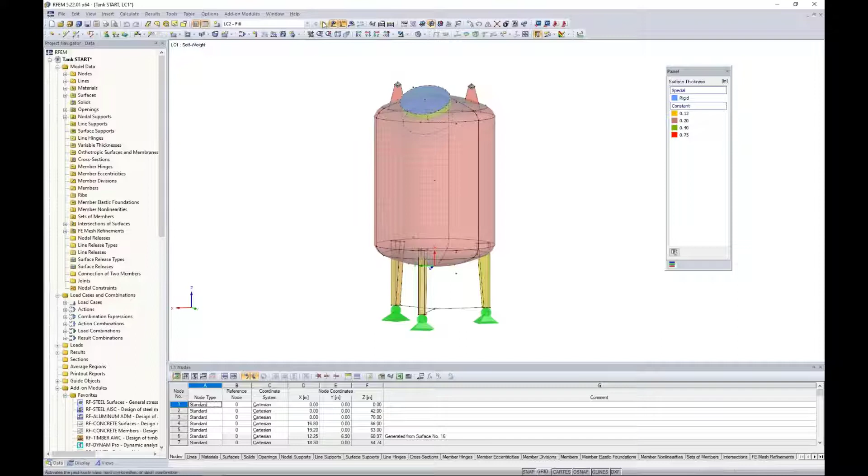We also had applied the loads to the structure, and we can see that within our drop-down box here are our different load cases. We have self-weight, which I don't have any visible loads displayed here because I didn't apply anything to the dead load other than accounting for the self-weight. The load case 2 here is the fill load, and this fill load was just an interior surface load within the inside of the tank.

We also have a wind load, so we can see the windward direction here from the global x-axis. We have a suction force on the leeward side. We also have a compression force coming up from underneath the tank, and we have a tension force up at the top here. Now we also put together all of our load combinations per the ASCE 7.

So as we scroll through these, we can see all 3 of those different load cases acting together on the structure. So starting where we ended from webinar 1, we'd want to run a calculation, and we can go to calculate all. And for the sake of time, I've already went ahead and done so.

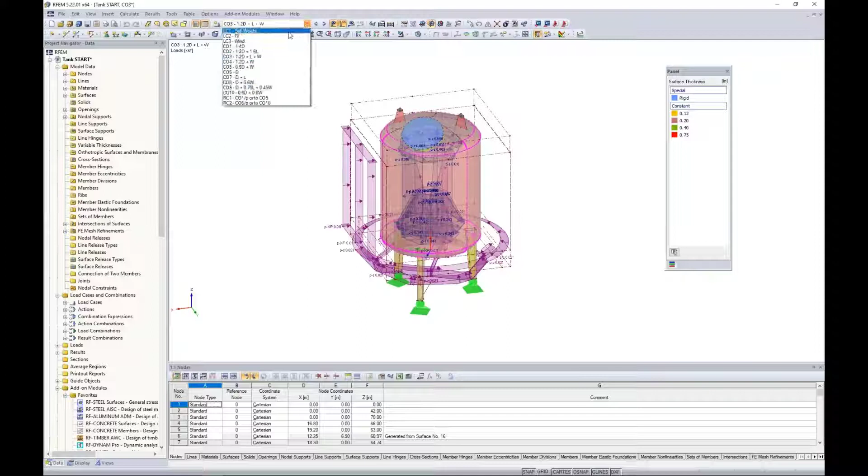So what we would be presented once we run the calculation is our results. And within the project navigator, we should now have this 4th tab available to us called results. And I think it's helpful if we just collapse most of these trees here, just to slowly go through all of the visible options, and we'll start off with the global deformations.

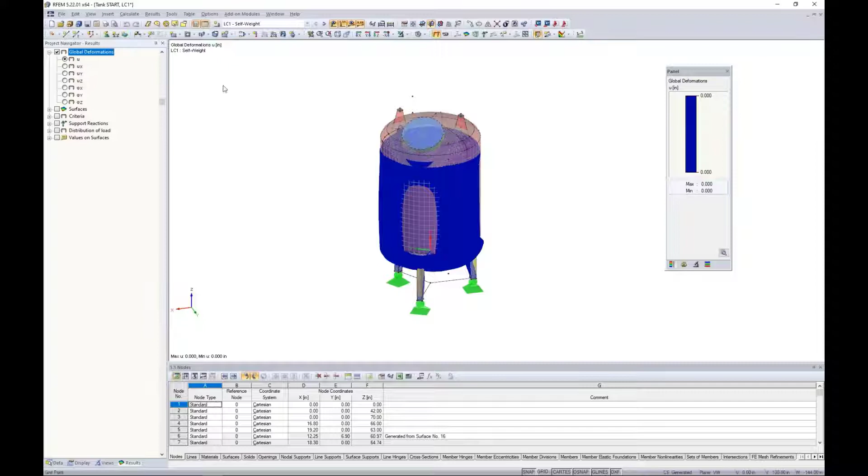So as I'm scrolling through these different load cases and load combinations, and I can go ahead and turn off my loads as well, I'll see the general deflection of the structure. So this might be helpful in understanding the behavior under the applied loads. If we see something kind of flying off the page here, then we would understand that maybe we didn't correctly model something, or maybe our loads were incorrectly applied. So it just gives us a sense here if everything is going well.

What else might be important is my fill load. Remember from webinar 1, when I double click on this fill load, we have it increasing linear in the Z direction. At the top of the tank, I want this fill load to be 0, but as we slowly increase the depth, we eventually reach a magnitude of 0.4 kips per square foot, which makes sense since the bottom of the tank sees a higher fill load than the top.

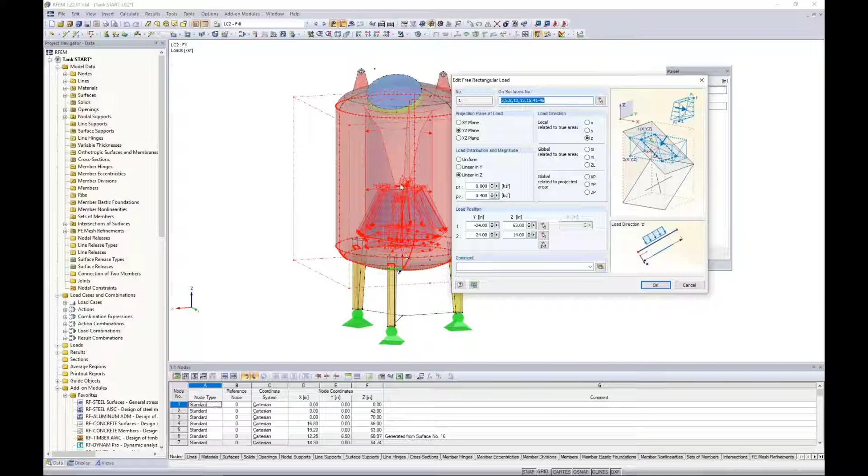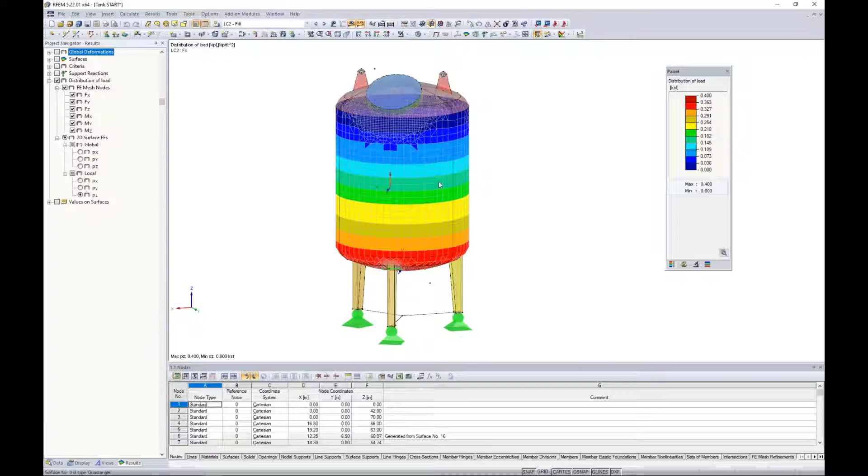So with this particular load case, after I have run my results, I can turn off the global deformations and instead take a look at the distribution of load. When I view the distribution of load in the local Z direction, we can see how this load was distributed on the FE elements.

At the top, we have this blue color indicating 0 kips per square foot, which is exactly what I defined with that surface load. But at the bottom of the structure, we have red contours defined, which equals 0.4 kips per square foot. So just a nice validation here that we correctly applied that fill load.

In a similar sense, we can take a look at the wind load. If I display this load again, we have this wind load acting in the global X direction. Looking at the distribution of the load with these contours, I should see my highest compression force on this windward side, which relates to the negative value. And in the back, we have this suction or tension force, denoted by this yellow positive value at about 0.01 kips per square foot.

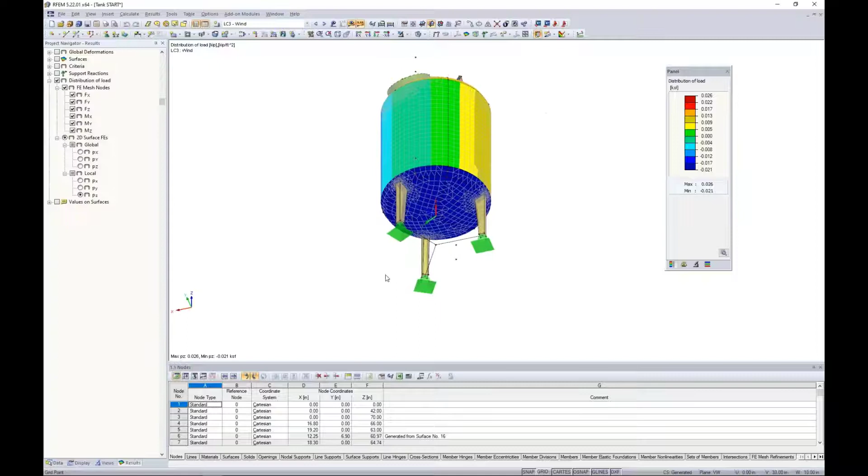At the sides, I should see essentially 0 because the wind's passing right over each of the side surfaces, denoted by the green color. If we take a look at the bottom, this shows the correct compression forces. And at the top, we have these suction forces denoted by red with a positive 0.026. So again, just a nice validation to ensure that we've applied our loads in the correct manner.

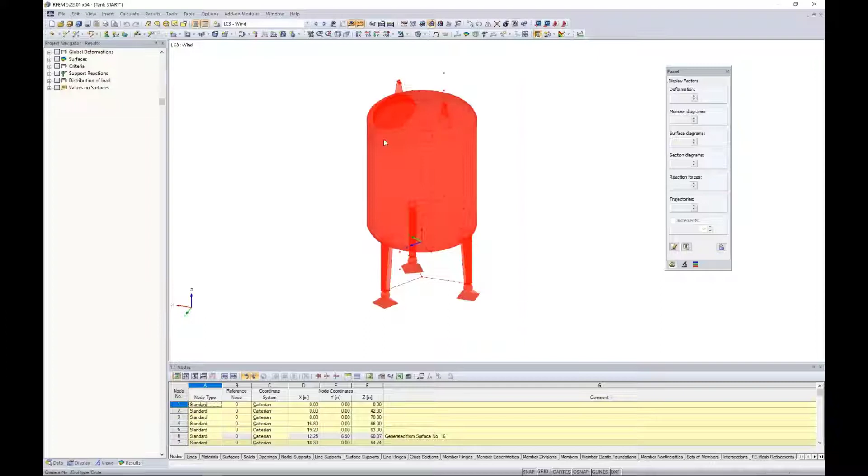We also can take a look at the entire structure by selecting it with my selection box. I can right click and view the center of gravity and info. The program throws up a warning that some elements have 0 density and won't be included with the center of gravity. We know this because in webinar 1 we created different intersections with our surfaces and deactivated components. We also have our rigid component for the top of our manhole that we would not want to consider for the density, so that's why those are set at 0.

But what this will give us is the information of the center of gravity, and we can also create a new node here. It's difficult to see, but there is a red arrow pointing to the center of gravity. More importantly, we can get information such as the surface area and the coating of the surfaces.

So why would the coating be important? Well, if we wanted to layer some type of coating on this tank structure or paint, we actually have the area in feet squared of how much paint might be required. We have the volume of the material as well as the weight of the material. So just a general summary of all of our surfaces that we have modeled.

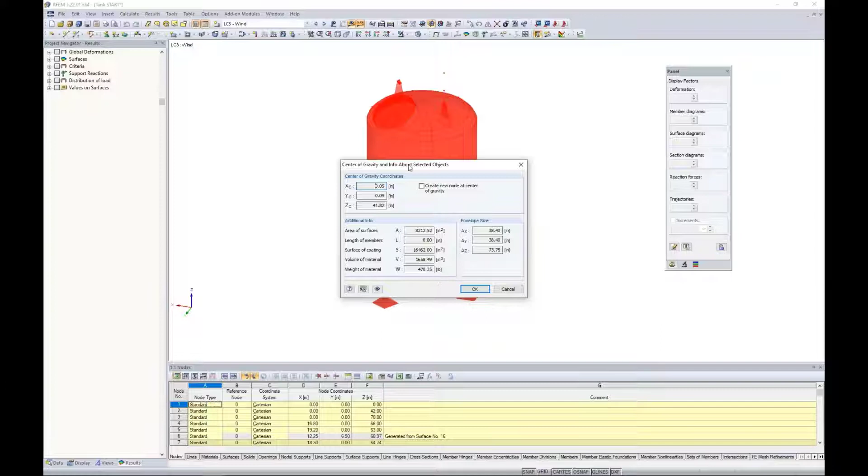In a similar sense, I can take a look at my tables, and I'll jump to my results here, which is table 4. I can view my results summary. What might be interesting is to jump down to load case 2, our fill load again. We can view the sum of the loads in the Z direction, and you can see it's set at negative 3.03 kips - this is the total load from that interior fill load I've applied.

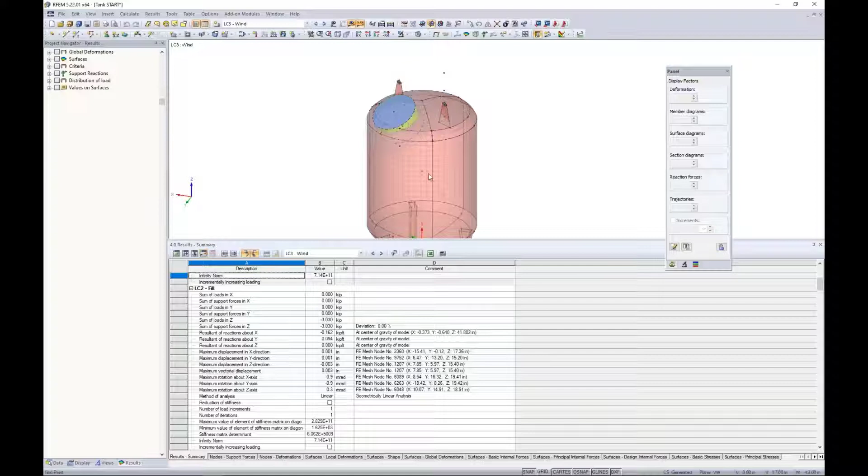Well, we would expect then for our support reactions to match this sum of loads. So when I activate the support reactions in my project navigator, we can turn on the global, making sure I'm under the fill load here. We can turn on the global Z components, and you'll notice that sure enough, we have 3 reactions in the vertical Z direction at 1.01. These add up to the sum of loads for LC2, the fill load, at negative 3.03. So again, just checking here that everything matches up quite well.

Now we can really move on to the results of our surfaces. So with this, I can expand my tree here for my surfaces, and maybe we jump to one of these different load combinations here to view our results.

Now, what we have visible to us here is local deformations. These are based on the lowercase x, y, and z axes, related to the individual axes of each surface rather than our global axes.

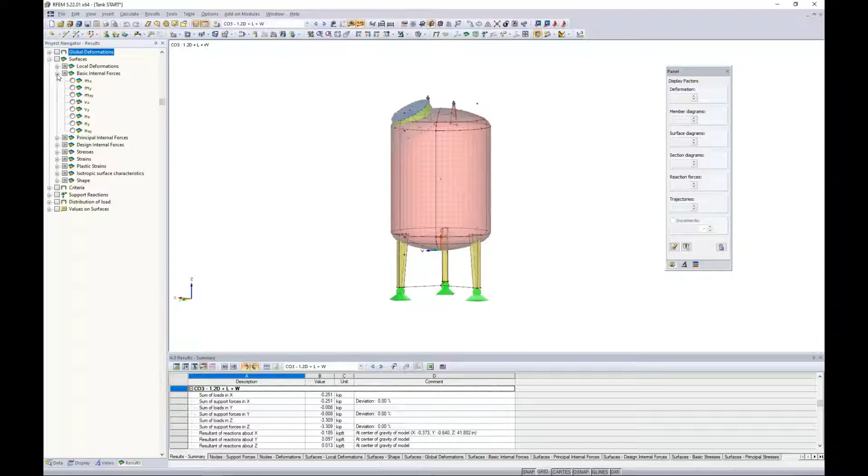But we can also view the basic internal forces. What I'll do here is activate a single surface and change the visibility by the selected objects, and I'll zoom in here. Let me also right click to turn on the local axes of this surface element.

So we're currently viewing the bending MX. We also have MY. We can view the shear forces as well as the axial forces, NX, NY, and NXY. One thing to note here that is unique for surfaces is that MX is not bending about the local axes, it's along the local axes. So this is contrary to our belief for 1D members that MX would be bending about the local x-axis. Surfaces or plate elements have a different convention here.

One thing that I think is helpful to understand how these internal forces are calculated, or the convention related to these local axes, is under the help manual. We can take a look at the manual in PDF format for RFEM, or we can also access the online manual on our website. So if you go to dlubal.com, you'll also find under downloads and info, online manuals.

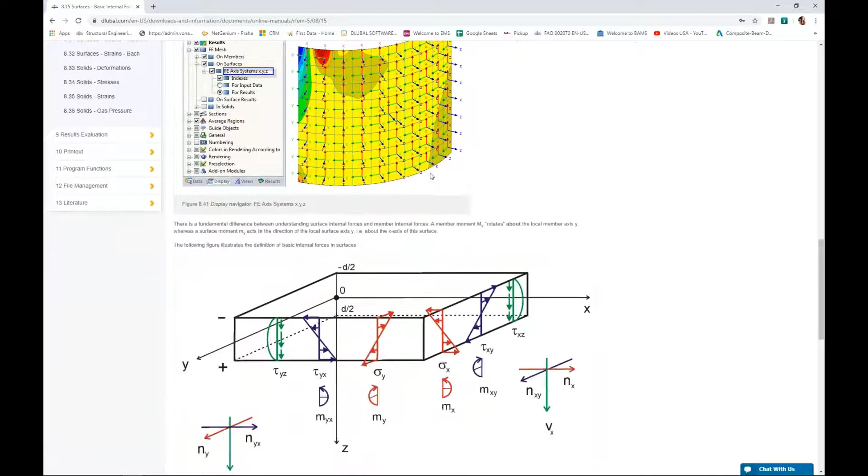I'm currently looking at the RFEM online manual, chapter 8 for results. And if we scroll down here to section 8.15 for basic internal forces, the reason why I wanted to point this out is because it shows a nice picture here of the internal forces in relationship to the local X, Y, and Z axes.

So again, we can see something like MX is bending along the X axes, MY is bending along the Y axes. We also see these axial forces, shear forces all shown here. This just gives us a little bit better view of how exactly those forces relate to the local axes. Now keep in mind too that for all of these internal forces, this is true for stresses as well. The equations are directly within the help manual. So if we're curious to know exactly how these internal forces are calculated, again, refer to the manual.

So going back to RFEM then, that will essentially sum up the internal forces. But you'll notice that the next option, if I expand the tree here, is principal internal forces. And this is showing me M1, M2, we have N1 and N2. So what exactly is the difference here between the basic internal forces versus the principal internal forces?

The basic is really internal forces to the freely defined X, Y, and Z local axes, as we already discussed. Well, for the principal, we will represent the extreme values of the internal forces. Essentially, we'll take the basic internal forces that we just saw and transform them in the principal axis direction. So principal axis 1 will be the maximum value.

So we can see here M1. Then we have the axis 2, which is the minimum value. And we also can display this alpha factor here. The alpha is going to be the angle between the local x or the y axes and the principal axes 1 or 2. And we need to increase the trajectory factor here.

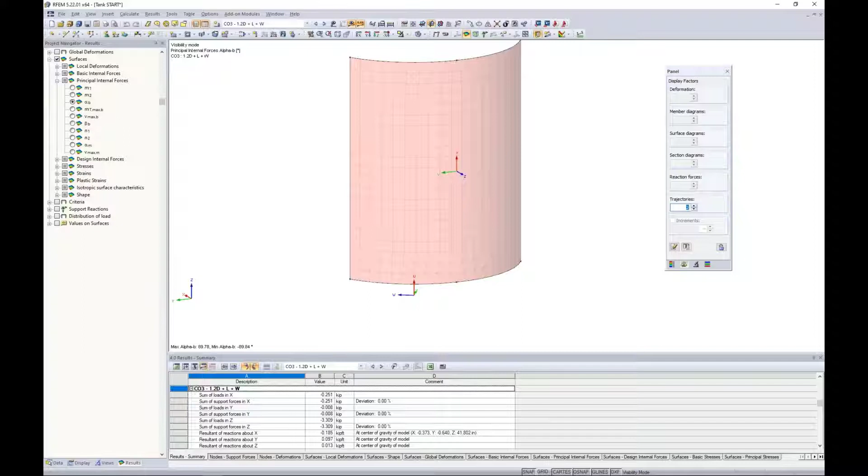So I do so quite a bit. And then we can see down at the bottom, those trajectories are visible to us. So again, that's going to give us the angle between our local x-axes and our principal axes. Now, in some scenarios with a completely straight surface, flat surface, maybe there is no difference between basic internal forces and principal.

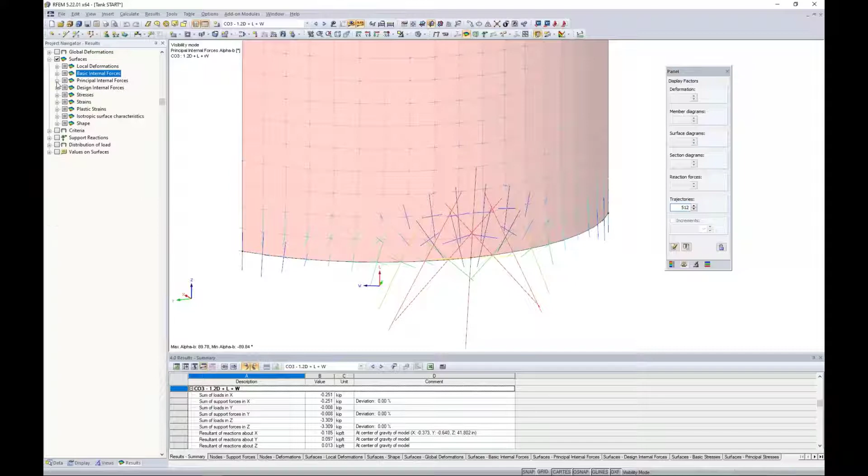Looking at the design internal forces, this is really more relevant to concrete design. So we're going to give you the positive and negative bending internal forces for the top of the surface versus the bottom of the surface. So you can imagine how that's beneficial for concrete design. This might be used if we weren't utilizing the add-on module within RFEM, but rather we wanted to take these internal forces into our own in-house tools or spreadsheets to do design. Now, today we have steel surfaces, so this really isn't of much interest to us.

Now we have the stresses also listed here. As far as the stresses, these are only available within RFEM when you have purchased RF Steel, the add-on module. And RF Steel, which we'll get into in just a minute, also releases these stresses within the main program. So if you did not purchase that add-on module, you would not see the stresses available here. Now, this is true for all materials, even timber stresses, for example. You would need to purchase the RF Steel add-on module, which sounds a little counterintuitive, but essentially that's releasing these stresses we are currently viewing.

So we can view the normal stresses in the X and Y direction, shear stresses, but we also have the principal normal stresses and principal shear stresses as well, based on those principal axes we just discussed. A little bit further down, you can see our equivalent stresses, based on 4 different hypotheses: von Mises, Tresca, Rankine, and the Bach theory. Quite common would probably be to refer to von Mises for design.

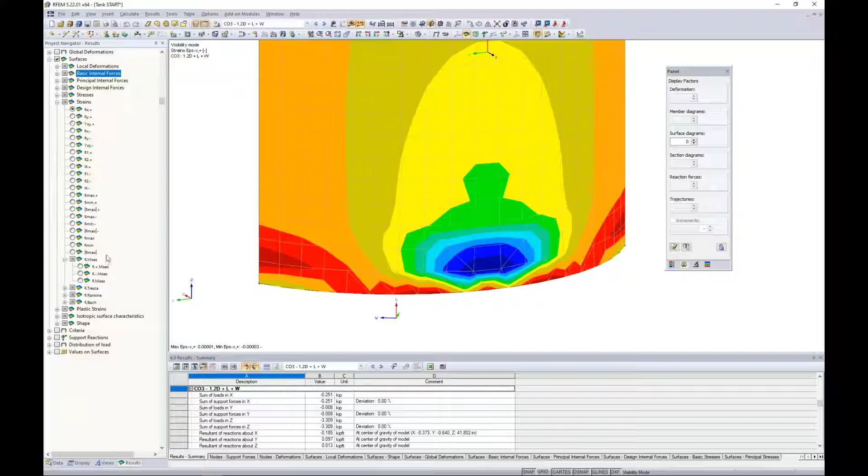We also can close down these stresses and view the strains in a similar manner. So we have our strains based on the local XY axes, principal strains, and then of course equivalent strains as well, which again are based on those 4 different hypotheses shown here, which maybe von Mises is most relevant to our design.

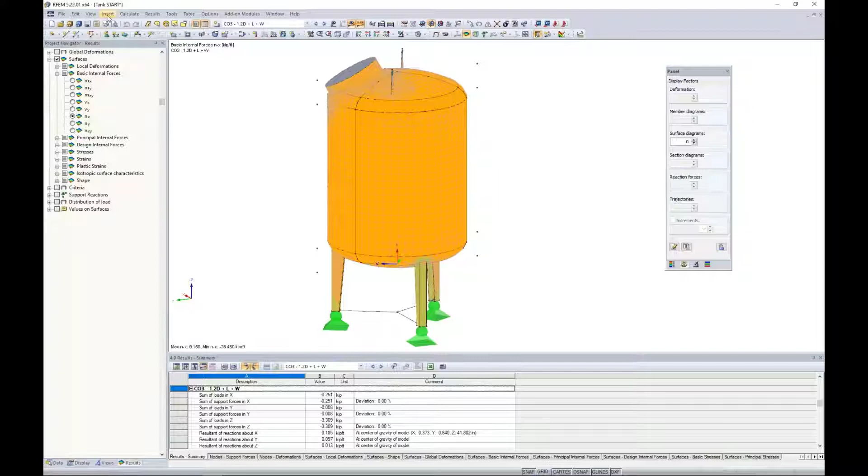Jumping back to one of the basic internal forces here, it doesn't really matter which one. I'm going to cancel out this visibility. I thought it would be a nice feature here, and if I turn off my local axes of the entire structure, what we can do to view the interior stresses of this kind of enclosed tank is to take advantage of our clipping plane. So under Insert, we have clipping plane.

What this will do is essentially slice through our tank here so that we can see the interior stresses. And we can set a step distance of 1 inch, for example, and then use our offset button here to click around within our structure, which will essentially cut through that structure with this clipping plane. We also can change the planes we're viewing, and even more so, we can change the rotation. So we can change this to 25 degrees, for example. Now we're viewing this clipping at an angle.

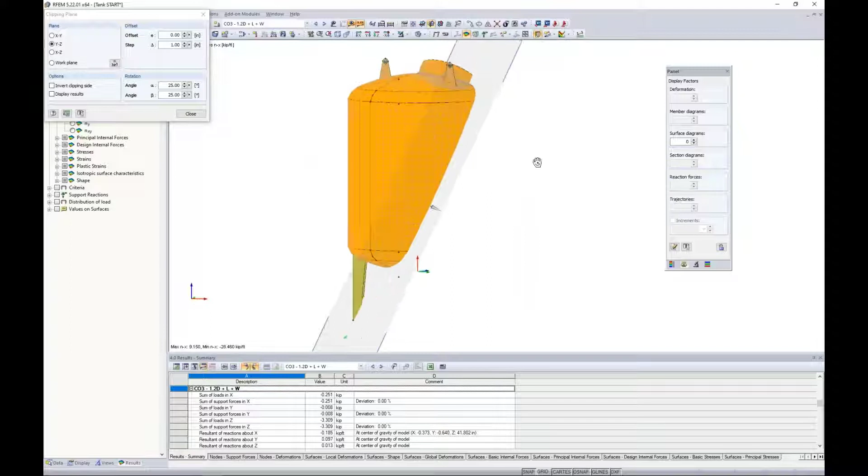So obviously the clipping plane may be an advantage to use when we're looking at these enclosed type structures such as tank elements. Where it's an even bigger advantage, as you can imagine, would be with 3D solid elements. So where we truly can't visualize the stresses on the interior of the solid element, clipping planes can become very useful.

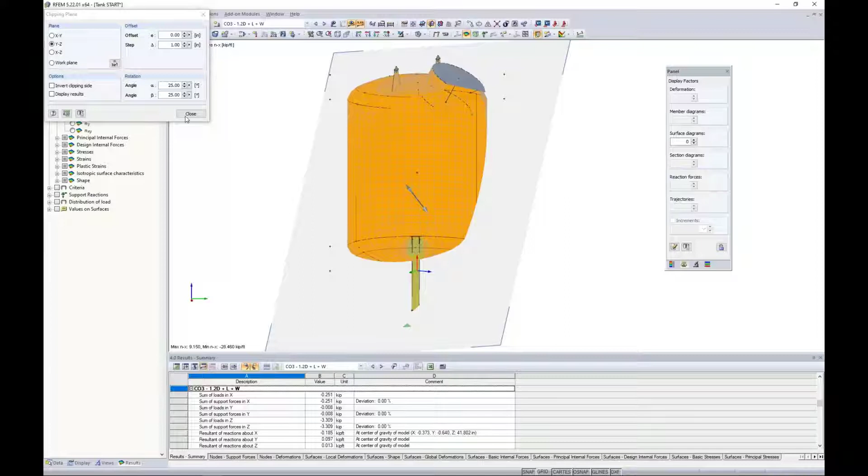Currently, we're looking at everything graphically, but I wanted to also point out that all of this information we're seeing visually here is also available in table format. And we can view again under table 4.0 the results. Perhaps we jump to the surfaces for the basic internal forces.

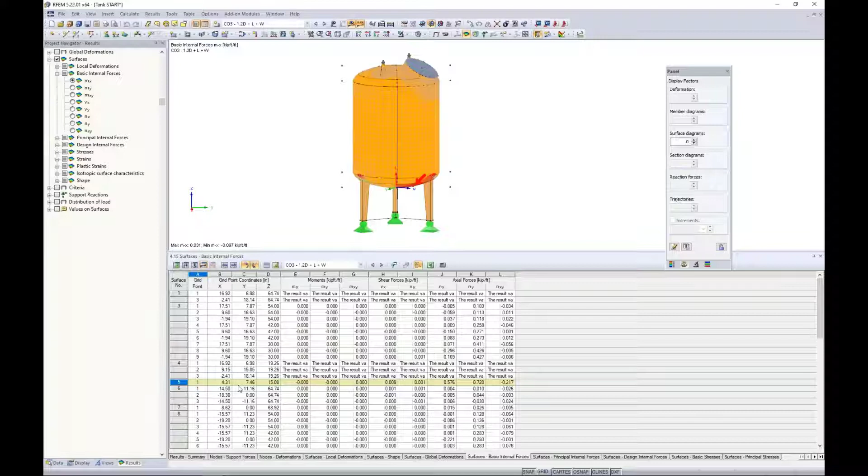There's a couple things I want to point out here: we're currently viewing each surface, and you can see the program syncs up in the background which surface we're looking at. But if we jump down here to surface number 5, you'll notice that only a single point is given to me here with internal force values. So why is that? Well, I'm going to create this visibility by the selected objects to take a look at surface number 5 here, and you'll see that single point given to me right here in the center.

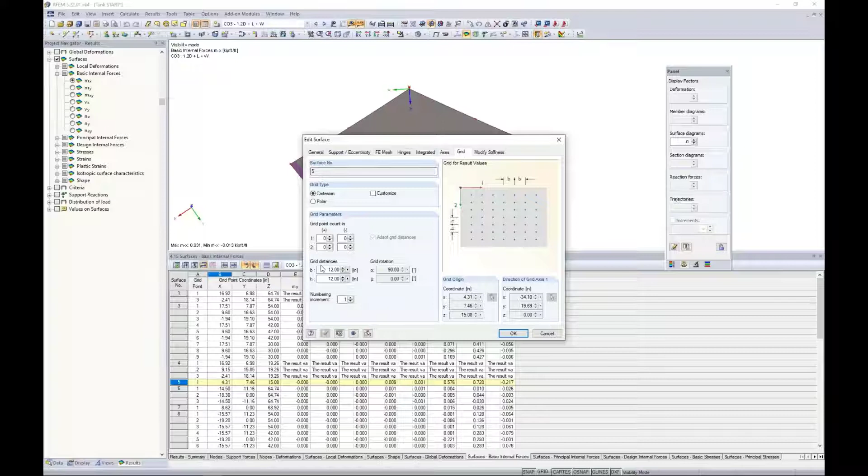This is a problem. Obviously, we're much more interested in the internal forces going on around this entire surface. So why is there only one value given? Well, that's because the results are based on grid points. If I double click this surface to edit it, we have a tab here called Grid. And by default, the grid spacing is set at every 1 foot. Well, this is entirely too big for our model today.

Now, this tank structure is fairly small, so we need to go back—in webinar 1, we did this with the FE elements. We want to do the same with these grid spacings, change this to maybe something like 0.5 inch spacing, and I click OK. So now you'll notice with surface number 5, I have many more points available to me here. This is obviously going to be much more beneficial than just a single point element.

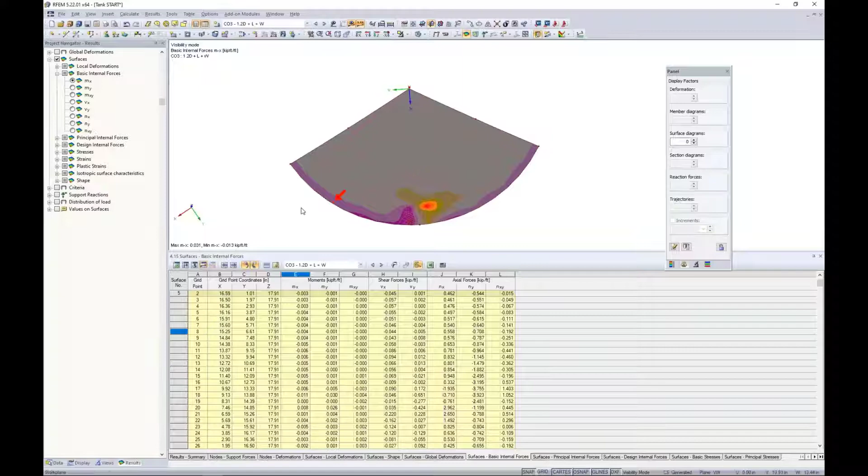Now the question might be, well, is the analysis incorrect without changing those grid points? And the answer is no. The analysis stays the same. You'll notice that we didn't have to rerun it. Everything we're viewing visually here is based on the FE mesh element points. And if I turn off my results here, turn off my loads, these FE mesh points are producing the results, and then we can graphically see this with the nice contours.

When it comes to the table, we're not presenting results based on every FE mesh point. You can see it's kind of all over the place, with no nice pattern to the FE mesh. So that's why we present it to you in grid points, so that every 0.5 inch spacing we're getting a result.

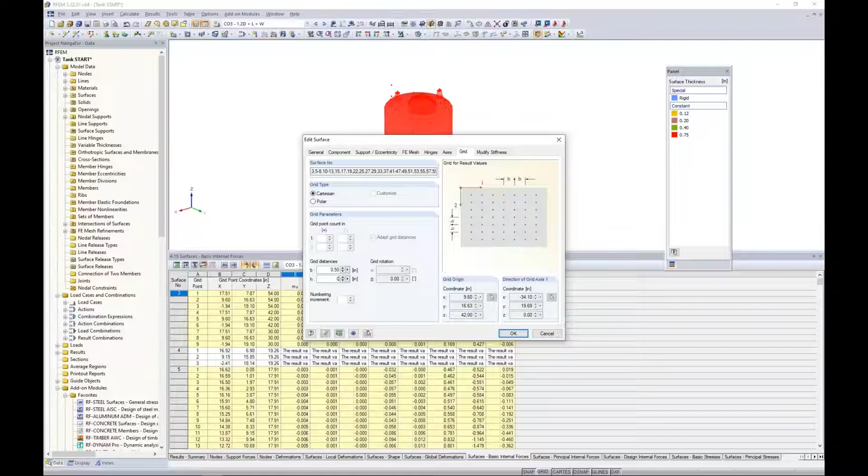What we need to do is cancel our visibility mode and zoom out to the entire structure. We want to select all surfaces, double click on them, and under the grid tab, change the grid spacing of all surfaces at once to 0.5 inches. Click OK, and now we'll see much better results within our table.

Keep in mind for these table results, we can export this single table automatically to Microsoft Excel. I can simply click this button here, and the program will take the current table I'm looking at and export it over to a Microsoft Excel spreadsheet.

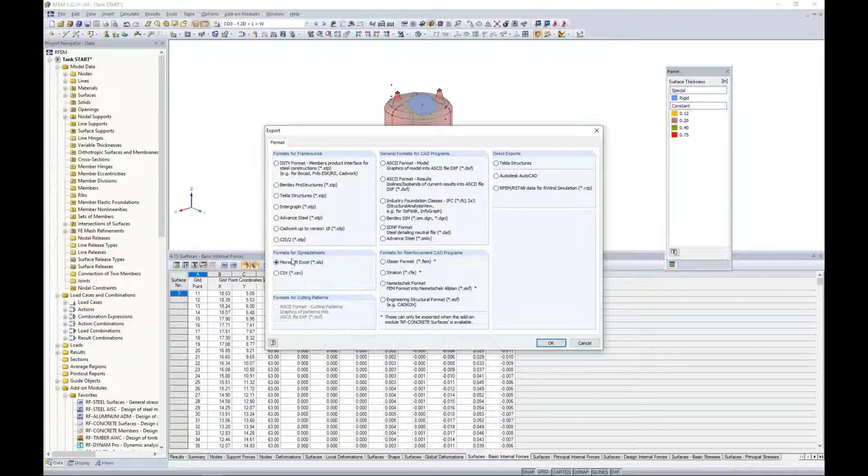If we wanted to export multiple tables at once, maybe for multiple load combinations or load cases, that's possible by going to File, Export. Here we have an XLS format. When I click OK to export to Microsoft Excel, this gives me quite a few more options.

You'll notice here I can activate my results, for example, and I can take a look at these detail settings for the selected tables. I can turn on several load combinations or all of them, and I also can select different tables to export.

So you can imagine this is quite a bit more efficient in terms of exporting rather than every single table from what I previously showed you. But if you're just looking for a quick export to further sort or filter data, then of course this is possible here.

Okay, so that really just gives an overall summary of the analysis results within RFEM.

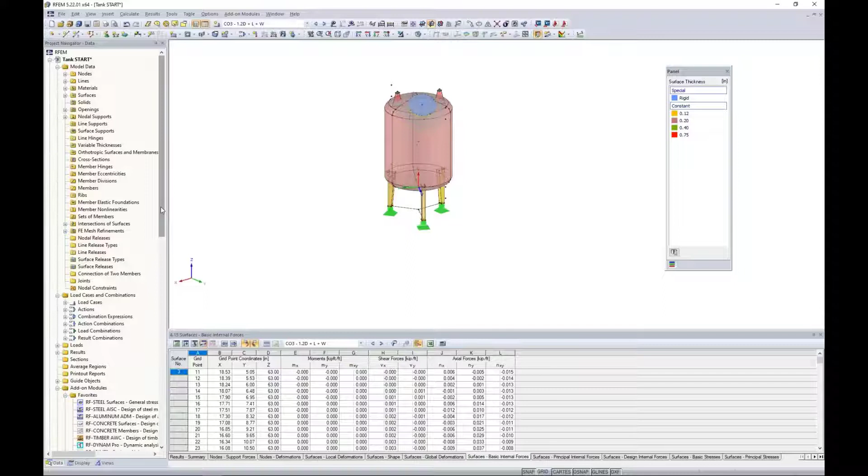What I would like to cover now is the general stress design of these surfaces utilizing our add-on module RF Steel. I already mentioned that RF Steel reads the stresses within the RFEM analysis, but it also can be used to do a general stress design.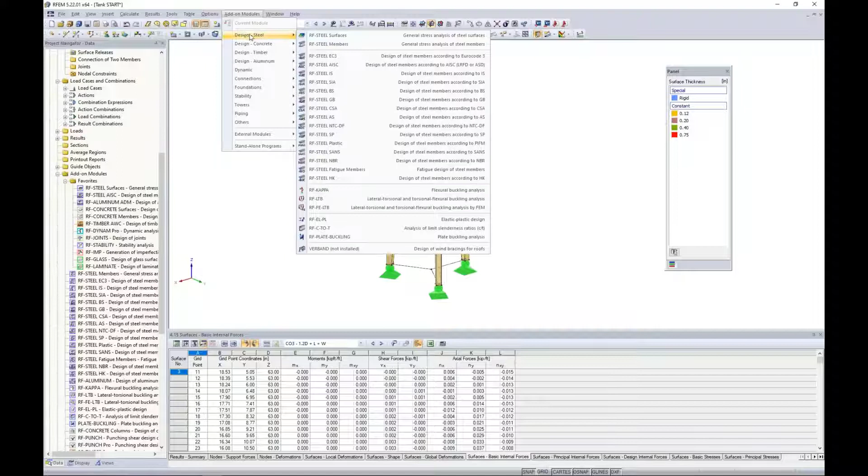We can access the add-on modules, as I pointed out in Webinar 1, under our Project Navigator. Here's our long list of add-on modules. RF Steel Surfaces is at the top because I've right-clicked and activated it as one of my favorites to jump it up to the top here. We also can access all the add-on modules from our drop-down box up at the top under Design for Steel, and you'll see here RF Steel Surfaces.

With this add-on module, as I always like to mention, it's just a simple dialog box that pops up within the main program RFEM. I don't need to remodel the structure, I don't need to redefine loads. Even all of those internal forces and stresses have already been solved for, so all of that information is coming into this add-on module. We're just specifying a little bit more information specific to the general stress design.

Now keep in mind also that this is completely code independent, so we're not designing per any particular code. We're just comparing the stresses from the analysis to the limiting stresses based on the material.

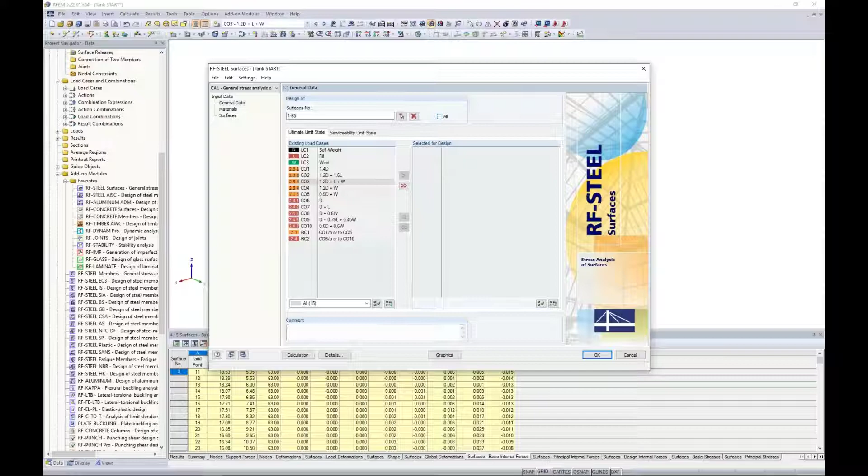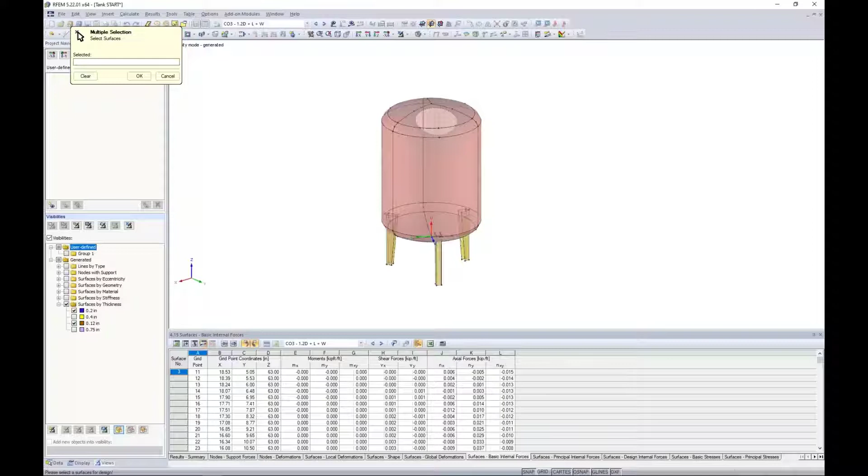By default, the program selects all surfaces to be designed, and I don't want that today, so I'm going to graphically select which surfaces. Under the Display tab, under the Views tab, is where I'm going to activate my surfaces by thickness. So I'm going to choose my surfaces that are 0.2 inches thick as well as 0.12 inches thick. This will highlight only in the graphical view the body of the tank as well as the legs. These are the only surfaces I'm interested in designing at the moment. You'll notice everything else is hidden, including the components on our roof.

When I click OK, all of those surfaces are individually listed out here. For the ultimate limit state, I want to move my LRFD load combinations over to the right-hand side to be considered for design. Additionally, I could select the result combination to be moved over to the right-hand side, or I could just design the result combination itself.

If we remember from Webinar 1, result combinations are going to be an envelope solution. So I have RC1 here, which would be the envelope solution for all my LRFD load combinations, showing me the max and mins. I prefer to list out the load combinations individually because then I can see my max and mins from each individual load combination, but either are possible.

The serviceability limit state is to check deflections. For my tank example today, I'm not so concerned with checking deflections, but if we were designing some type of floor element or industrial structure sensitive to machinery, where deflections are a true concern, this is where we'd move our ASD load combinations to the right-hand side for serviceability. We'll leave those blank for now and move back to the ultimate limit state, continuing down our list.

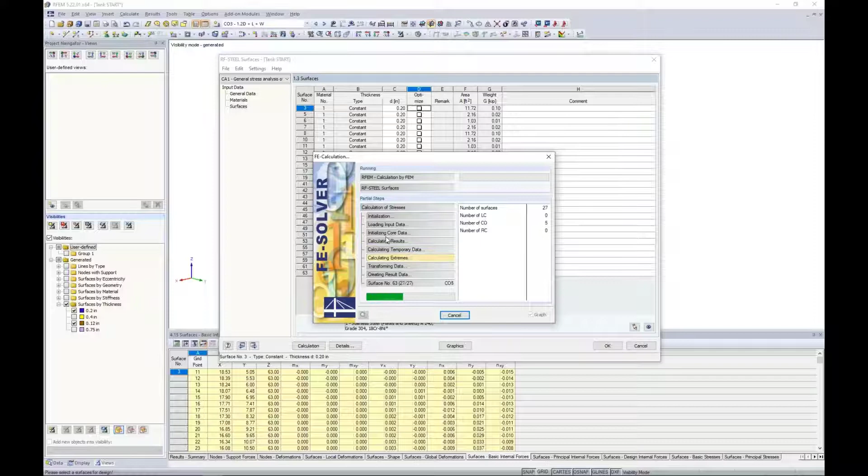When I run the calculation, it solves pretty quick because we already have all of our stresses from RFEM and the analysis for LRFD load combinations. We're just bringing them into this add-on module and comparing to the limiting stresses based on the material.

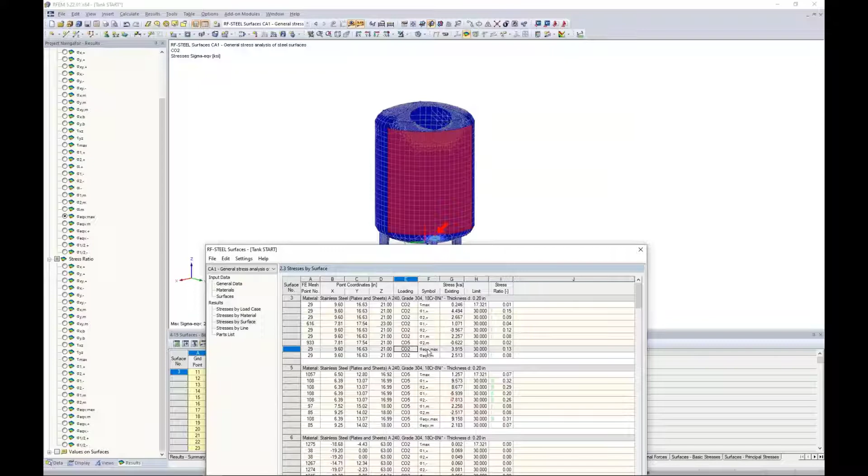So we now have our results tables available to us, and we can view the stresses by load case, by material, or by surface. When I pull this down, we can see that everything is synced up in the background. We have the red arrow pointing to where the controlling internal force is, as well as the surface highlighted that we're currently looking at.

Here's the column for existing stresses, all listed out. Here's my limiting stresses based purely on the material. And from this information, we get the general stress design ratio. Now there are only a handful of stresses listed out here.

Under the Details tab, this is where you can control what stresses are turned on or off and used for this design. By default, we have already selected a handful of stresses available. We don't want to check all of them—that's completely overwhelming and may not be necessary for the design. But if you're interested in turning different stresses on or off, you can do so under this Details tab. For the most part, most of these stress design ratios look okay.

But when I take a look at the filter options here to filter to the max design ratios, and view the summary down at the bottom, I have a max check of 1.4, which is greater than 1.0.

So I'm shown here my red sad face. This is obviously something that we need to address. We're over that yield strength. So how can we do so? Well, let's take a look at graphically what's going on rather than just in our tables.

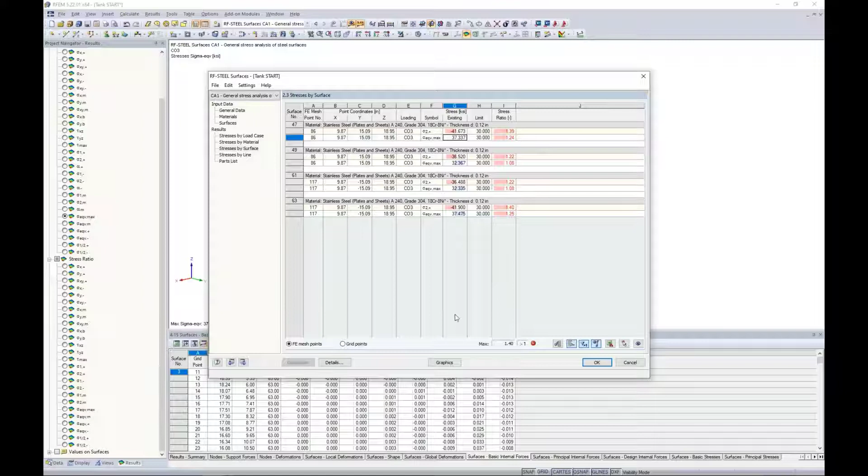I'm going to click here to my equivalent von Mises stresses. You'll notice it's for load combination 3, and I can click on my graphics. Most of the tank here, when we look at our von Mises stresses, keep in mind we're still within this add-on module RF steel, we just view the stresses or the stress design ratios graphically. When I scroll in here, we just have these teeny tiny points that are really causing the issue, and everything else looks completely fine. So this is what we would call a singularity.

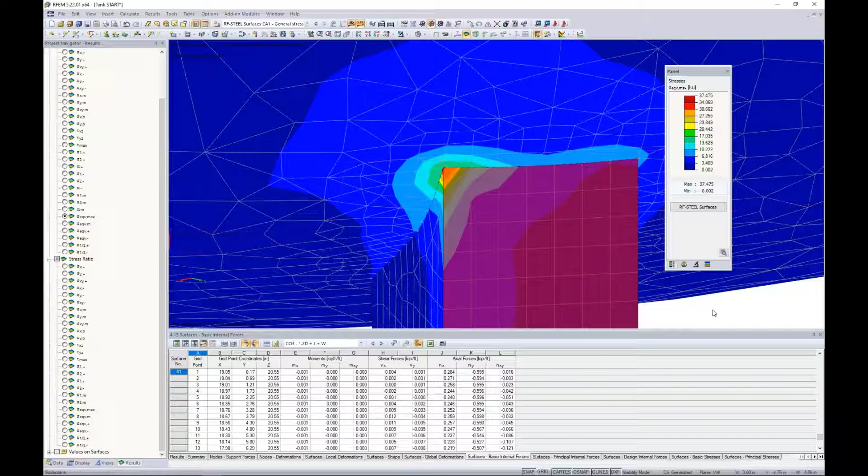Singularity is not unique to RFEM. It can happen in any finite element analysis software. It's really a point, an FE mesh point, where we have a very high stress concentration and we're not getting great load distribution. We know in reality where this tank body is connecting to the tank legs that we're going to get much better load distribution all along this length than what the program is showing me. So how can we better tell the program that the load distribution is there, that these high stress or high peak points are causing the over design of my general stresses to be much too high?

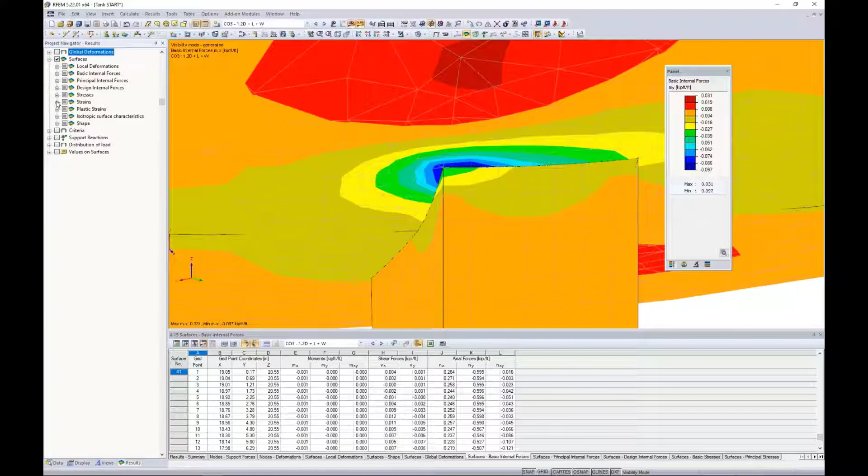Let me jump to load combination 3 here because we have determined that that's the controlling load combination, and I'm going to turn on my stresses, my von Mises stresses. So this is exactly what we were looking at within the add-on module itself.

Under the display tab, and what I've done here, this is typically what would be available. I know it looks a little bit overwhelming, but again, we can collapse these trees, and eventually I want to focus on this results portion here. We also have these surfaces, which I can expand under the results, and the distribution of internal forces and stresses. You'll notice here that we have several options for how we display these stresses. The third option is default here, but I want to focus on the first 4 options and what exactly they mean within the program.

For this, I'll jump to the PowerPoint. So as far as the display of surface results and those 4 options, number 3 here is default within the program, and we'll get to that in just a minute. But let me begin by explaining the concept here of these 4 pictures: we have 2 adjacent surfaces. The surface on the left is denoted by 6 FE mesh elements with their individual boxes here, and then we have a surface element adjacent to it indicated by these 3 FE mesh elements.

So when we choose the first option, constant on elements, we have every FE mesh element point here, right? And we're going to average out those 4 points for a single FE mesh element, and give you that average value right here in the center. Then we're going to base our colored contours only on that average value. So each FE mesh element will only have one color here.

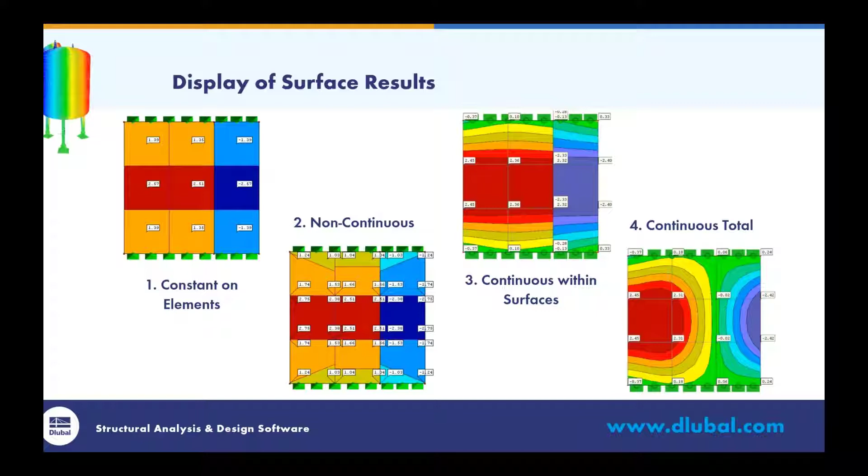So again, number 3 is typically fine, that's why it's default, but there are scenarios, especially when we're looking at a much more local scale here, where these small elements are connecting at every FE mesh point, that we want to change this to constant on elements.

Going back to the RFEM model, you'll notice here that when I have this as a default, continuous within surfaces, my von Mises stresses is set at 37 KSI. When I change this to constant on elements, now each FE element has its own color, and the stress drops significantly from 37 KSI clear down to 16 KSI. That's a huge difference. Now, this doesn't relate to what's right versus wrong with the analysis itself, it's purely how we're viewing our results graphically. Just by changing this view, you can see how much those stresses are impacted.

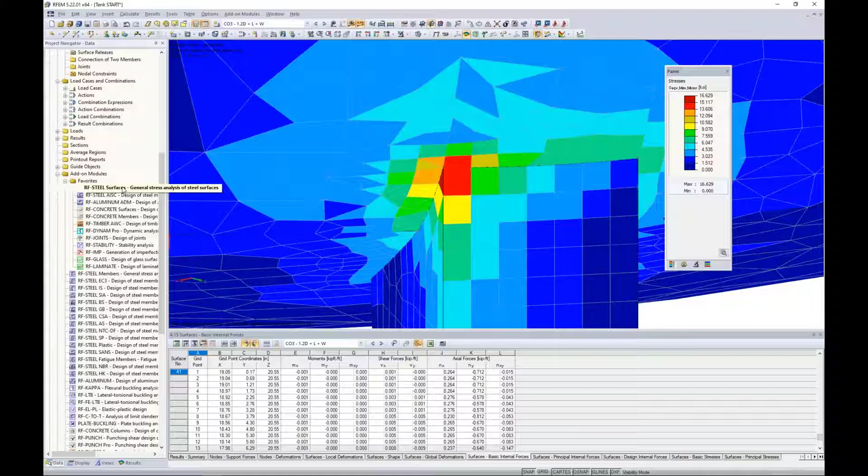Now, when I go back to the add-on module RF Steel, let's launch this add-on module. I want to point out that I changed my display, as we saw back in RFEM. But when I'm looking at the total stress design ratios here, they're still showing 1.4, which we know our highest equivalent von Mises stress, for example, is only 16, so we should be well below this.

Well, the reason why is under details, we need to set this under the options as well. We would change the distribution of internal forces to constant on elements. So although we've changed it back in RFEM, the add-on module has its own separate option that we want to change. When I click OK, the program says it needs to recalculate the results. So we let it bring in those internal forces again, and it compares to the limiting design stresses. Sure enough, you can see my max design ratio is now 0.62.

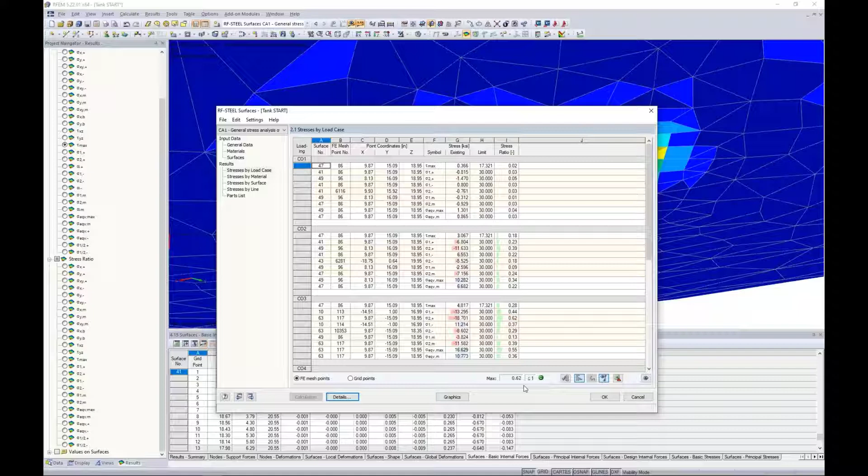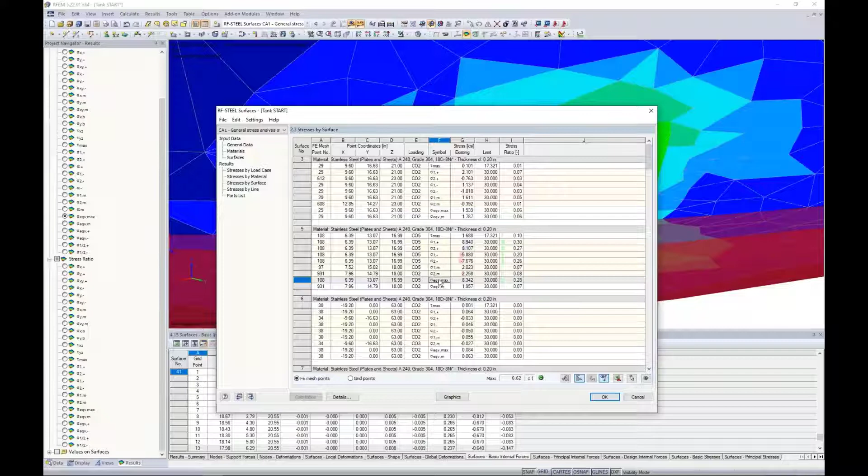So just by changing the view of our results, we can significantly impact the overstress design ratios within the add-on module. Now, if we take a look here, stresses by surface, let's look at the von Mises stresses, for example, and jump to my graphics view again. I'd still like to point out, though, we took care of this high design stress ratio. We're definitely sitting much better, but I'd still argue that there's a singularity still occurring at this location. If you look at the rest of the structure, the stresses are so low, but when we look at these FE mesh points, they're still relatively high.

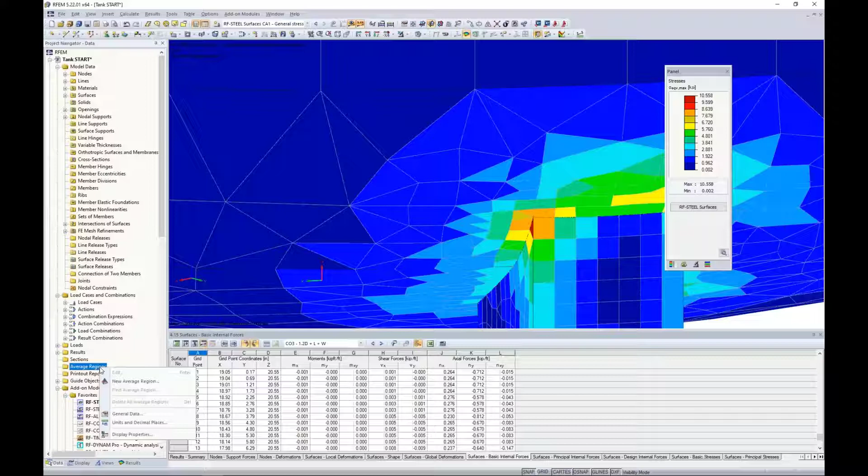So I want to take this a step further to address these singularities by applying what's called an average region. Under the Data tab, what I can do is access a new average region by right-clicking on it. We launch the dialog box, new average region, and it's exactly as it sounds. What we're going to do is average out the internal forces over a particular region. This is quite powerful because I can select multiple surfaces here to be considered.

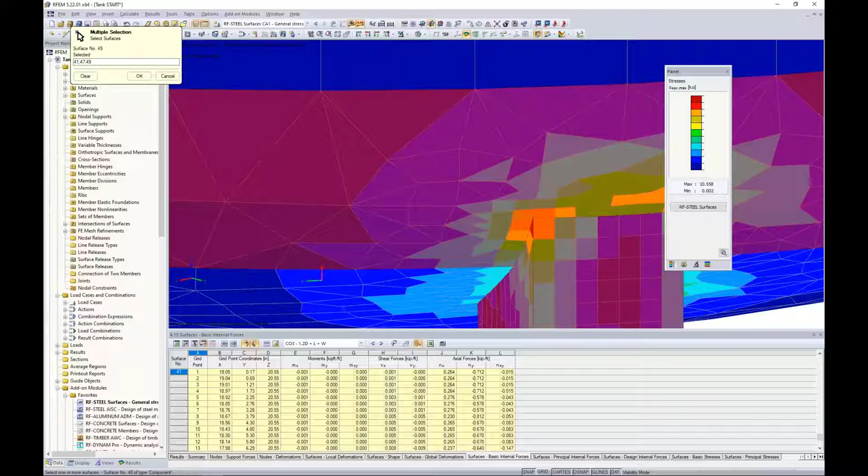So we'll select the tank body. Maybe I also select these two surfaces from my tank leg. And I click OK. So we need to define the average region as a circle as well as the dimensions. I will set this at 2 inches. Now, the question we may get is, how big should we set the average region?

And this really depends on your project, and it's up to the engineer's discretion. We're working with a very small tank here, so 2 inches is adequate just to apply this smoothing region at this particular location. But you can imagine if we set this at something like 2 feet, that's entirely too big to average out the internal forces. But 2 feet might be perfectly fine when we're averaging out a concrete slab where we have a column framing in. So again, it really just depends on your project.

We want to tell the program where to place this average region. So graphically, I can select this node here, and the coordinates are automatically populated. I'm going to choose all 4 checkboxes here. What this does is average out the internal forces in all directions. This is based on the local axes, U and V, of the average region versus the local axes of the surface, X and Y. We need to specify a projection direction, and we have the global X, Y, and Z axes given to us here, but from RFEM Webinar 1, we remember that working with this circular tank structure, we're not so able to relate the model to these global axes so easily.

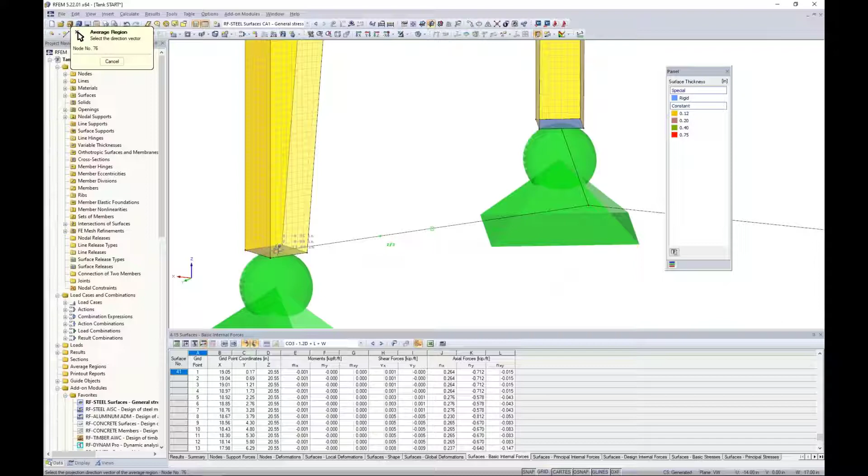We remember from the first webinar, we created all of these points. Zooming into the bottom of my leg, I'm going to choose the center point here. My second point is going to be the center of the tank structure as a whole. Now this projection direction was automatically calculated, and you can see the parameter set here.

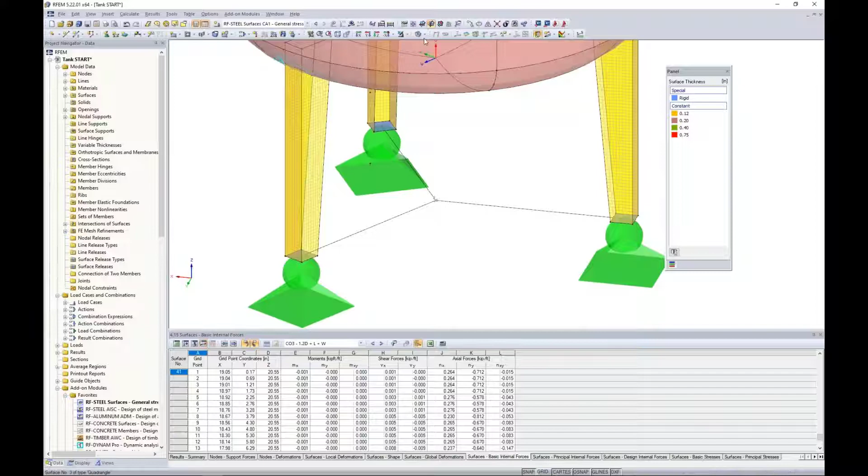We want to distribute the internal forces through all surfaces. So when I click OK, it might be better to turn this to a wireframe view. We have an average region defined here, and I know it's a little difficult to see, but you can see that we've applied this 2-inch average region. It's being projected towards the center of the tank structure.

So when I apply this average region, I'm going to view my results for load combination 3, and we can turn these on. I'm going to maneuver my model here and zoom into this point. I'm currently viewing my von Mises stresses, and notice that we no longer have these high peak forces here. We're instead averaging out over this 2-inch diameter region for those von Mises stresses.

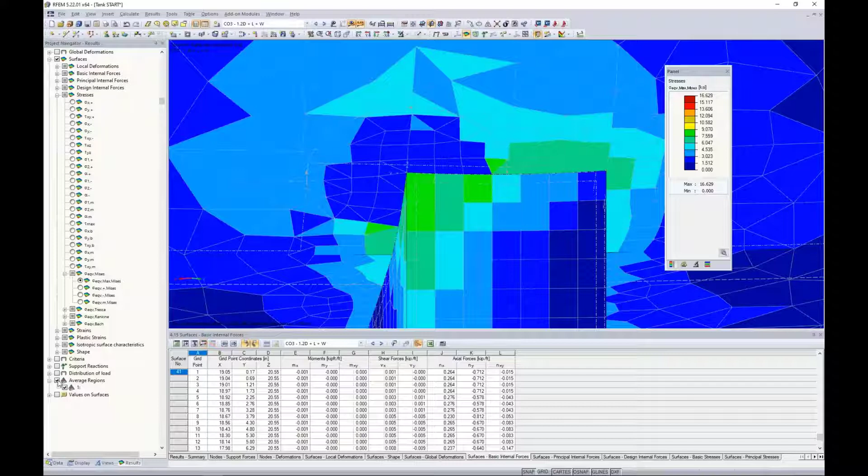Now, when you apply average regions, you have a new checkbox in your results where you can turn on and off the average region. So if I turn it off, well, here we go - there's those high stresses visible to us. We can activate the average region again, and they completely disappear.

So we'd want to continue adding these average regions to other locations where the legs are framing into the tank body, just to alleviate those high peaks. For the sake of time, we won't be doing that today, but hopefully you have some insight on how to apply average regions for odd structures like this. Obviously, a flat surface would be much easier to apply an average region in terms of the projection direction and such.

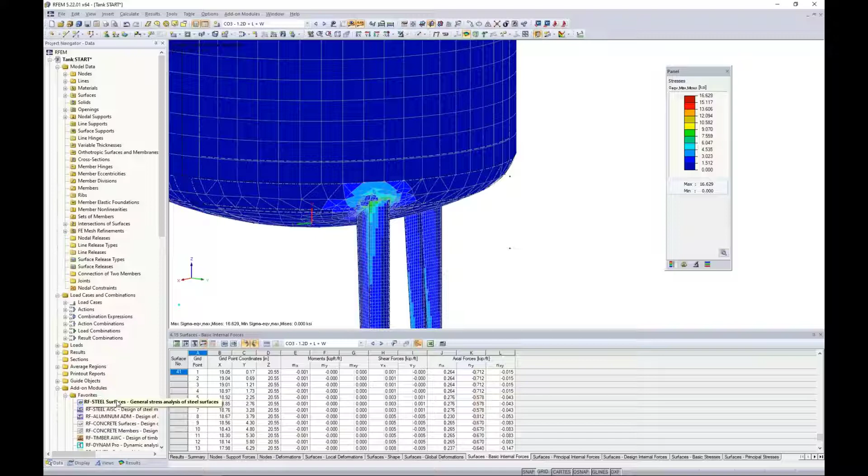Now back under the Data tab and RF steel surfaces, in a very similar manner that we saw previously with the display of internal forces, under the Details tab and under the Options tab, we do need to apply the smoothed internal forces from the defined average regions. Otherwise, they will not be considered. So we just take that extra step within the add-on module to say yes, please consider them with the design.

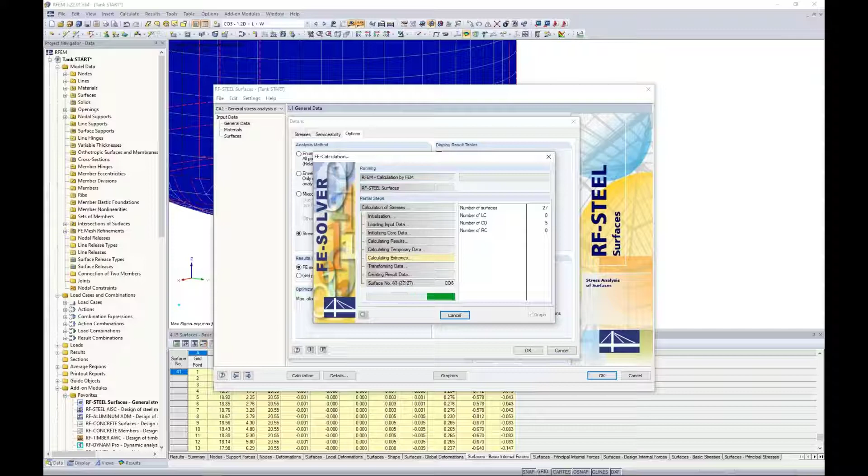The program will cycle through the quick analysis again, and we will be presented with our results. Now, I didn't apply the average regions to the other locations, so we're still seeing the same design ratio, but we would expect this to fall significantly, and then maybe we could optimize our tank thickness quite a bit further.

All right, so that really explains a general stress design for these surface elements utilizing that add-on module. The next thing we'd like to discuss is the stability design, and in particular, the buckling behavior of this structure, and we'll be relating that to imperfections.

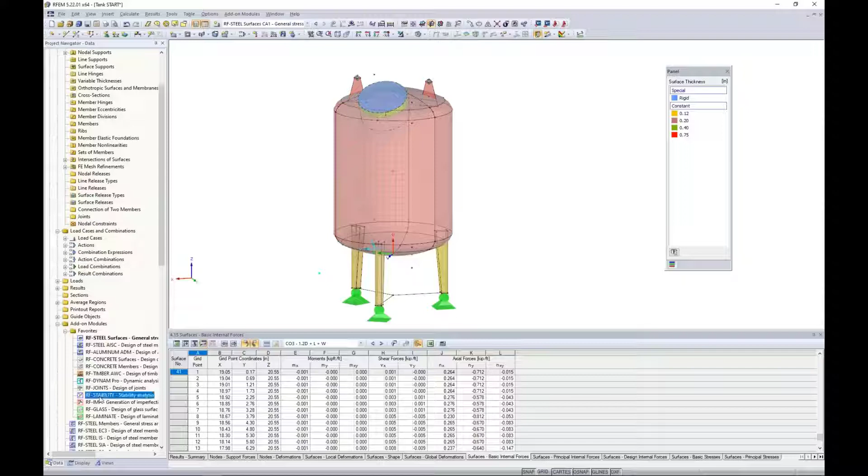So I'm going to launch RF Stability from my list of add-on modules here. When I do so, the add-on module has a similar feel to what we saw with RF Steel Surfaces. Now it's a little bit different - this is going to allow us to run an eigenvalue analysis on the structure.

In previous webinars, I've used RF Stability to track down instabilities. We all know that instabilities can be incredibly frustrating within a finite element software, so RF Stability can be extremely helpful in tracking down where exactly we may have a problem. But today I'm going to be utilizing the add-on module to do a general buckling analysis to identify modes of failure for the structure under the applied loads.

The number of eigenvalues needs to be defined, and the default is 4, so we'll just leave that as we have defined here. We want to import in either a load case or a load combination. So my worst case scenario has been load combination 3, and you certainly want to import either a load case or combination that has the highest axial forces.

We know that this is going to give the worst buckling failure modes as opposed to importing something that's applying tension forces. For example, the program will throw up a warning that says, hey, I can't really apply the eigenvalue analysis for buckling because we have tension forces. So something to keep in mind there.

Now, the stability analysis calculation method by default is set to an eigenvalue analysis. This is a linear analysis, and this is what we'll first be running through today, just for a quick calculation. Keep in mind that nonlinearities within the RFEM model will not be considered.

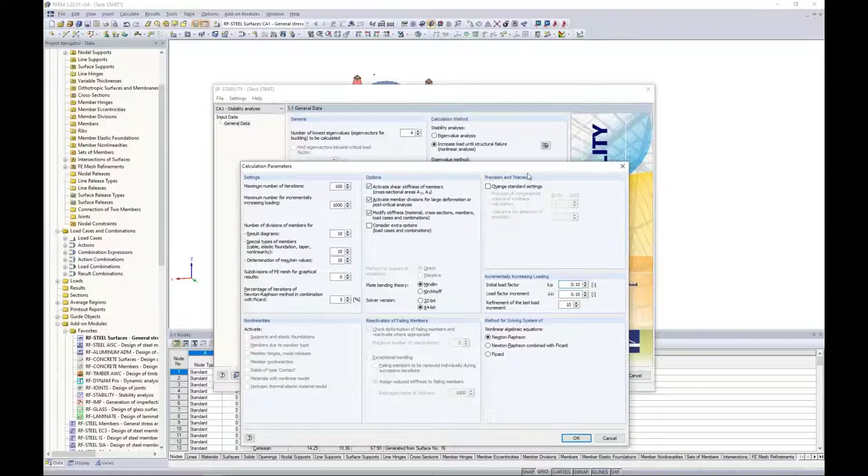We do have a second option here to run a nonlinear analysis, and this actually will consider any geometric or material nonlinearities back within the main model, and we have the ability to incrementally increase the load. This whole section I'll get into a little bit later on at the end of the webinar, because I think it's actually pretty powerful in what we can do with a nonlinear buckling analysis. But for my initial calculation here, I just want to run a linear analysis, get the basic buckling failure modes.

Now, when I click calculate, the program runs through the first 4 eigenvalues. You can run up to 100 eigenvalues if you want, but it really doesn't make much sense when we're looking at those higher eigenvalues, because the buckling mode failure will probably never occur. It's taking extremely high loads to even see that type of buckling mode. So that's why we set this at 4 eigenvalues, and this will just give us the general failure modes within our structure today.

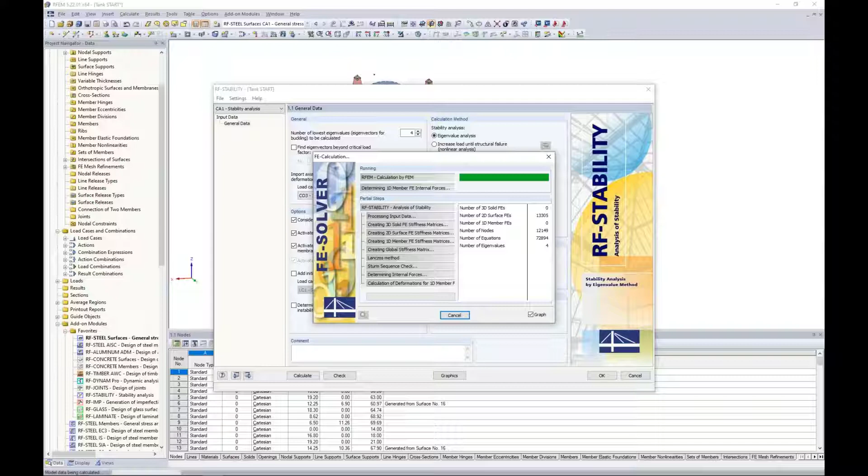So once this is done solving, we're presented our results here in table format, and we see the first 4 eigenvalues given to us. We can also scroll through these, and you'll notice in the background the RFEM model is synced to whatever mode shape we're currently viewing, and it looks to be essentially buckling of this leg over on the right-hand side for the first 4 eigenvalues.

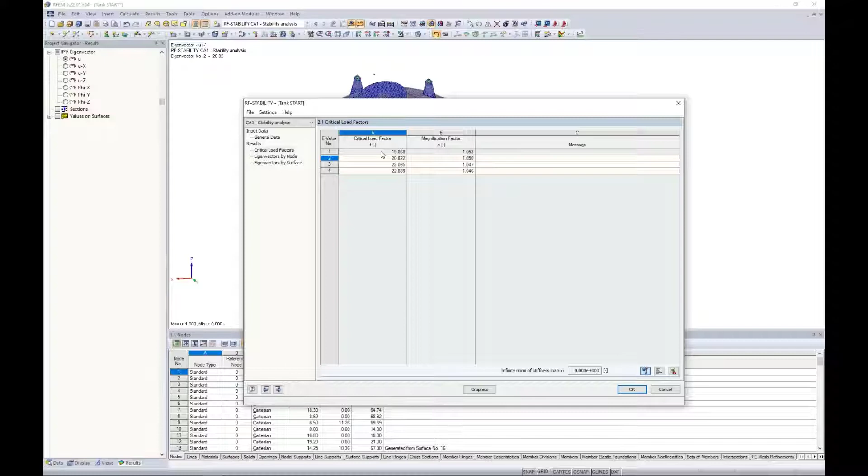And we're also presented with the critical load factors. These critical load factors are the values you can multiply load combination 3, that we imported before, by to see the failure buckling mode shown in the background here. So you can imagine that additional eigenvalues may not be so relevant when we're getting into those higher numbers. But of course, if we were solving for higher numbers, we might see buckling of the other 2 legs, or even of the tank body itself. Something to play around with.

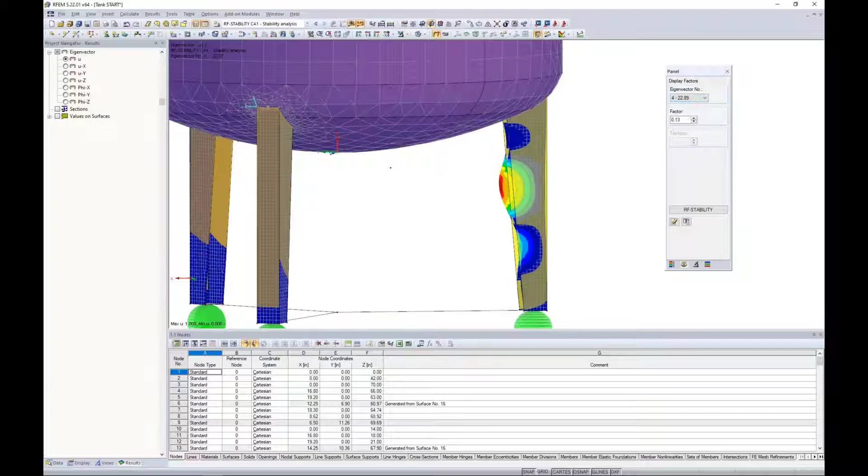Looking at the first eigenmode shape, we can jump to our graphics view. Now, once again, we are currently in the RF stability add-on module. I'm just viewing my results graphically here, and under this second option within my panel, we can also drop to the different eigenmode buckling failure modes if we'd like. So everything has to do again with this leg over on the right-hand side.

The eigenmode is shown to us here, and I can right click on the boundary line element of my leg surface. When I right click on it, I can choose results diagram. What this will bring up is the buckling mode shape in kind of a results diagram format. Let me turn on the Y direction here so we can see the buckling behavior of that leg element along that line. Now, the reason I'm doing this whole procedure is because I want to relate this buckling to modeling imperfections.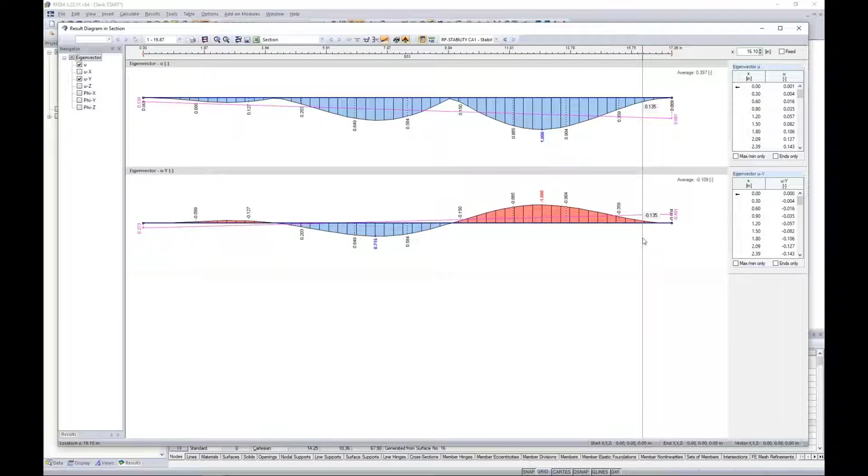And we all know that when we're constructing a tank or any type of structure, there are installation errors, maybe incorrect construction methods, or we don't properly manufacture the elements, and inevitably we have imperfections. Everything we're modeling within the RFEM program here is perfect, essentially, and this is true for any general finite element analysis. All lines are perfectly straight, all elements join together at every FE mesh point, when we know that in reality, lines probably won't be straight.

Surfaces aren't all in one plane. Mistakes happen, and there are tolerances given for these mistakes. This comes from the AISC Code of Standard Practice, in particular Section 7 13.1. It discusses misalignment of members and surfaces and such, and these tolerances can be less than L over 500, where L is the distance between working points.

So keep in mind that L is not the distance between the start of my surface and the end of my surface, but rather I want to use my working points where I see my inflection points. So looking at the general buckling view here, I take a look at the first inflection point taking place at about 10 inches, and then I scroll over to the end at 17 inches. Well, this would be my working point at about 7 inches in total.

So what we want to do here is model the imperfection, keeping these tolerances into consideration. I also want to backtrack and mention that AISC 360 tells us we should really model these imperfections directly. There are other alternative methods, such as applying notional loads, but in some way they should be accounted for. So we're going to refer to the AISC Code of Standard Practice.

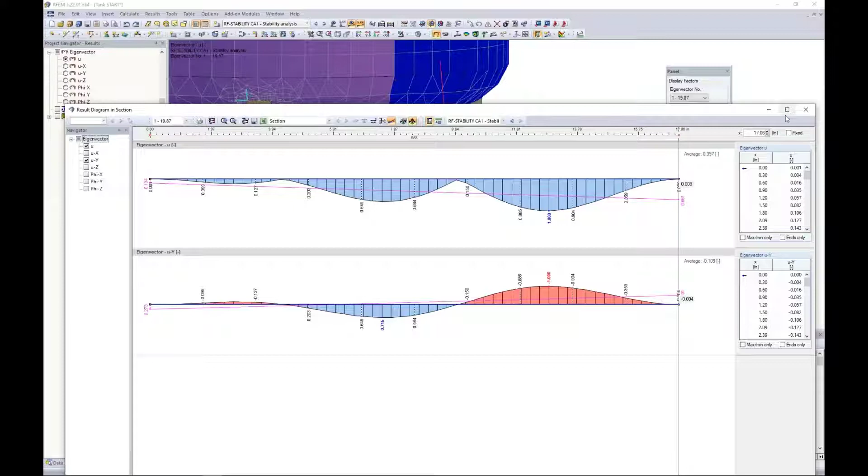Now that I have my working distance here, notice that because RF Stability runs a general eigenvalue analysis, nothing is given to us in terms of a length. Everything is unitless, so this buckling mode ranges from 0 to 1.0. What I like to do is model this imperfection that can potentially occur and scale it based on L over 500. With my L being 7 inches divided by 500, we want to scale this to 0.014 inches, which is just 7 divided by 500.

This is where I'm going to activate my other add-on module called RF-IMP. RF-IMP is pretty powerful because it allows me to import a buckling mode from RF Stability. So we'll choose our first buckling mode, and I'm going to scale this because, remember, RF Stability is unitless. So we're scaling to 0.014 inches, given to us by the AISC Code of Standard Practice.

We can actually generate the pre-deformed FE mesh in order to affect the imperfections of the surfaces. So when I click calculate here, the program is actually going to deform the FE mesh based on the scaled buckling mode. Then we'll be able to consider that before we even run the additional load cases such as dead, live, or wind load.

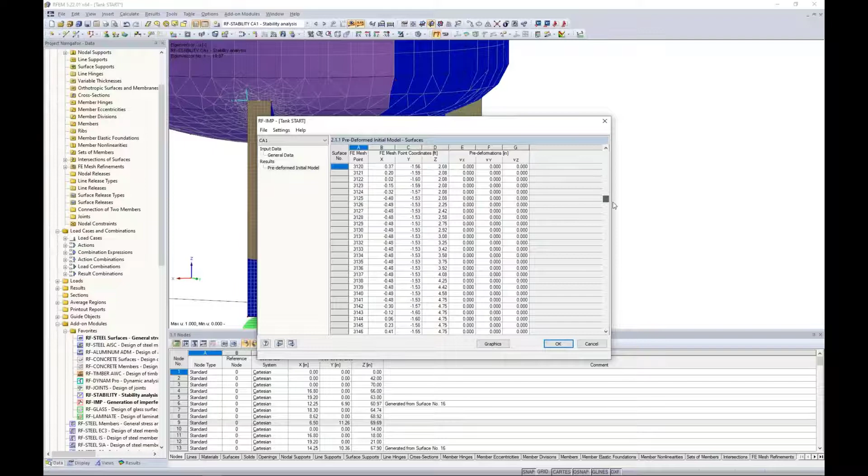So after RF-IMP is done with the calculation, I can see every single FE mesh point listed from my model, and most are set at 0, 0, 0 because nothing's really changed. But we eventually get to a point down here where some of these values are being modified. You can see the big red arrow—the program's telling me it's going to deform the FE mesh at this location based on the scale of 0.014 inches that you gave me. So now this can be considered as an imperfection, and we can directly model it.

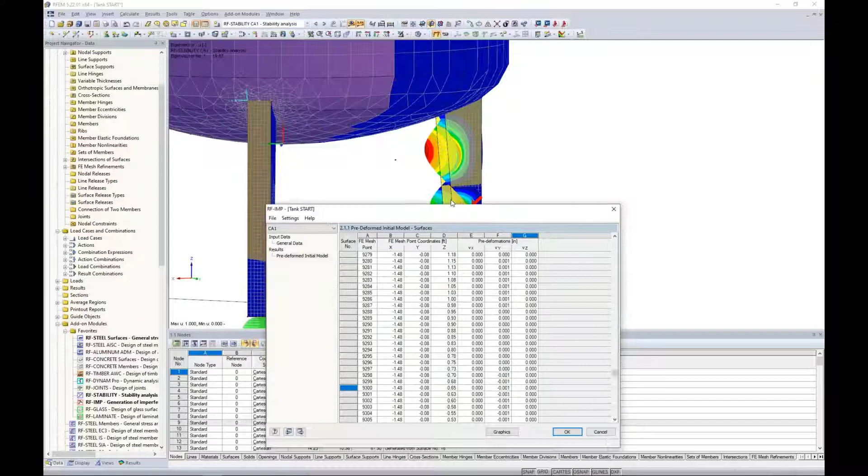Once I'm done with the deformed mesh, I need to go up to my load cases and combinations. We visited this dialog box in quite a bit of detail within the first webinar. Under the Load Combinations tab, remember we generated all of our load combinations automatically according to ASCE 7. So I'm going to create my own manual load combination, which I can select from this button in the lower left-hand corner, and I'm going to replicate load combination 3.

So I'm going to call it 1.2 dead plus live plus wind—identical to load combination 3 we're seeing up here—but I'm going to take this a step further to apply my imperfection that I just created with that deformed FE mesh. So I move all of my load cases over to the right-hand side to be considered, and I'll change my load factor here for dead load to 1.2.

Under the calculation parameters, we have the extra options button. The extra options allow me to activate my deformed mesh from RF-IMP. So that imperfection, the deformed mesh, is now considered with these load cases I've defined here. I click OK, and we can run this load combination by starting our results.

Now I am running according to a second order analysis just to give us some quick results here. Maybe in reality we would want to run according to a third order analysis just to get even further into the analysis and the details. So I went ahead and ran this.

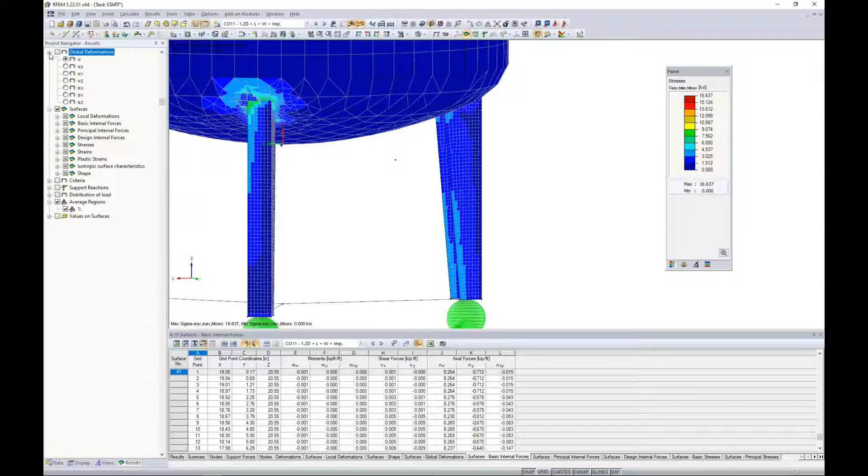But in order to make sure that the deformed mesh was applied, I did notice when I turned on my global deformations in the Y direction that we can see this buckling kind of mode shape with the deformed mesh is considered.

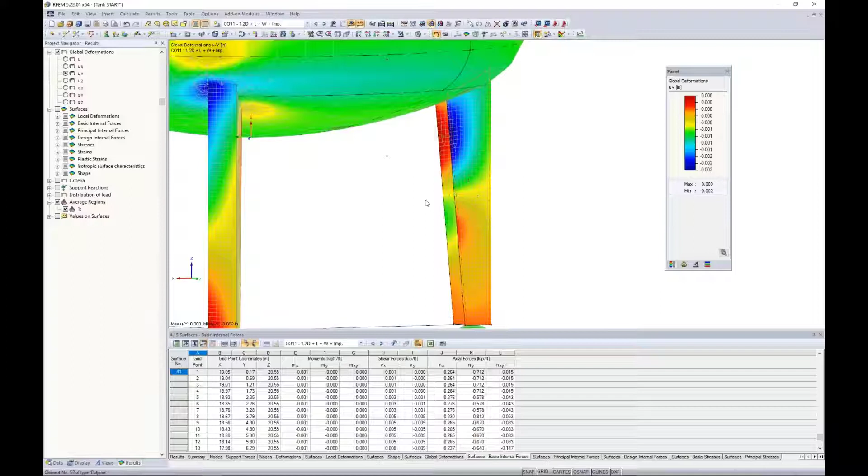We have ever so slightly some deflection here in the Y direction that indicates that mesh was deformed. Possibly with a third order analysis, we could even see more of those results available to us. But this in general is just one way that we can directly model these imperfections, because not everything is going to be perfect as we're modeling here, but rather there will be errors with the manufacturing or installation process.

So the final thing I'd like to show you today relates back to RF stability. I said we would touch on a nonlinear analysis for the buckling behavior of the structure. Instead of going back to the add-on module, I'm going to access my load cases and combinations again. Under the calculation parameters, I briefly showed this to you in RF stability for the nonlinear analysis. We actually have all those same options directly within the RFEM program itself under the particular load combination.

So we can incrementally increase a load here until our structure fails. You do need a license of RF stability in order to access this information. The reason I'm doing it here in the load combination itself is because we have a couple other options that are not available to us within RF stability. So slightly more powerful here.

So what I'd like to do is create a new load combination, and we will call this one 1.2 dead plus live plus wind plus our imperfection. Taking it one step further, we will check out this structure until it completely fails with this buckling method. So load combination 12 here is still considering the imperfection, plus we're going to activate the incrementally increased loading.

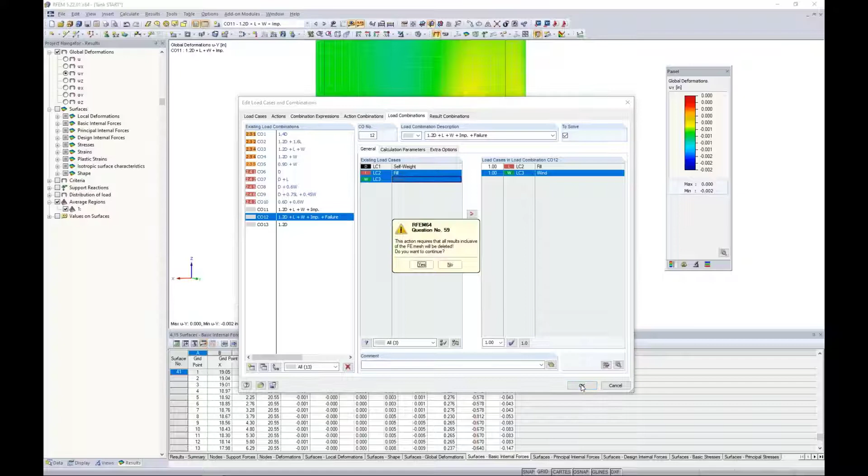So once we have defined this load combination completely, I can click OK. And the program asks me to clear the results. That's fine. And we would want to run the calculation by clicking on show results for this single load combination.

For the sake of time, I went ahead and did so, just because it does take a minute to solve. And we will be presented here with our deformation, our results for this particular load combination.

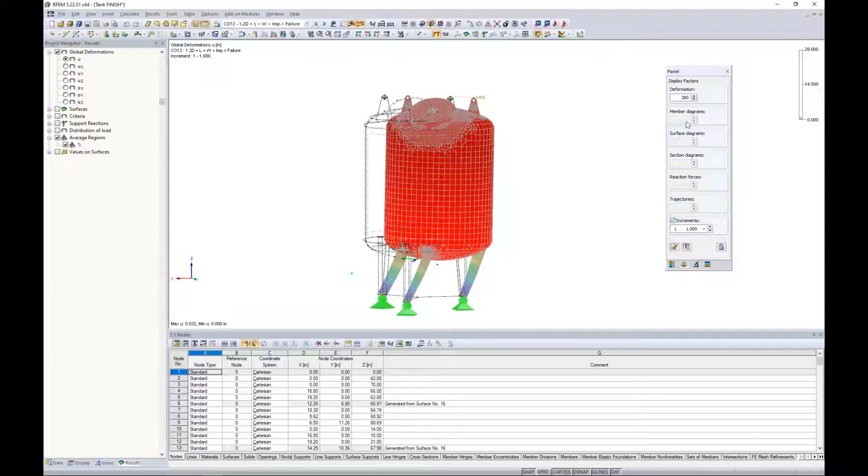What we have the ability here is to view the different increments. Remember, that was one of the checkboxes I just selected. So maybe I change my deformation factor to 30, so it's not quite so big. We can lock that down here so it doesn't change as I change my increments.

The other thing I'd like to do is, under the Display tab, I'm going to hide my results, and we're going to look at this FE mesh settings. Now it's default here to show the FE mesh on the surfaces, but I'm going to change that to the surface results. So as my structure begins to deflect here, the FE mesh will also follow. It just makes the view a little bit easier to see what's exactly going on.

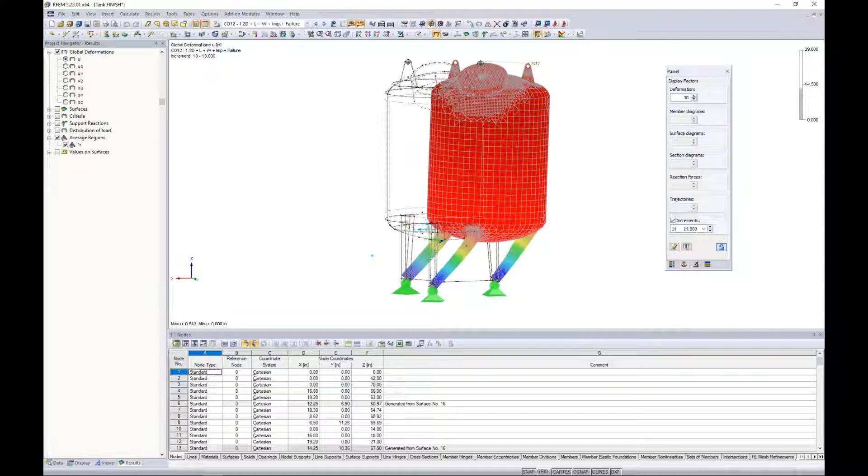So here's my first load increment. 100% of my loads from load combination 12 are applied. But now I can begin to scroll through these different load increments to see the structure deflect under 800%, 900%, 1,000% of the loads. And what will be most apparent here is if I take a look and zoom in, we can actually see the buckling of that leg element.

And I can even take my leg here and highlight it by choosing the visibility by the selected objects, so we can really see the source of failure for this particular leg, and we can continue on with the additional load increments.

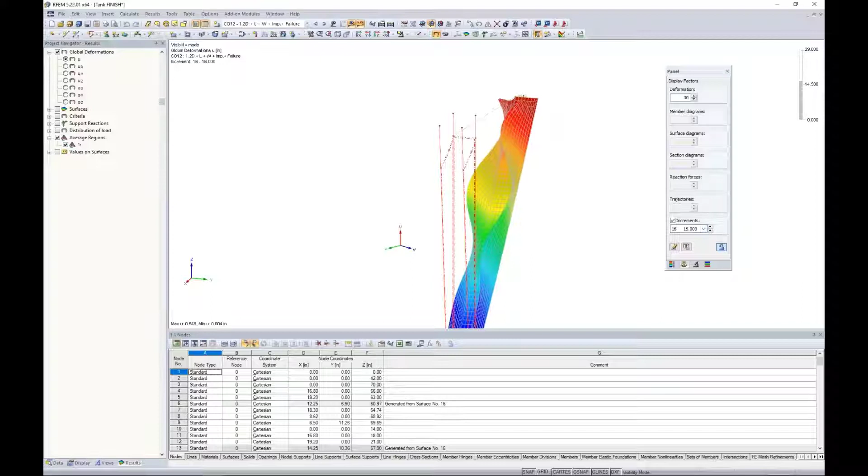Now I can activate the rest of my structure here graphically. So as we're reaching these higher load increments, the structure is still holding on. We're seeing very, very large deformations here. I mean, of course, the deformation factor is set at 30, but obviously the leg is a problem until we get to a point that the program says, okay, I can't handle any more. It's reached 29 load increments and the structure has completely failed.

So we might be interested in load increment 28 here, and we can even scale down our factor to 10 just to see moments right before the structure fails.

Now, these load increments are pretty high, but you can imagine that when we're dealing with a much more sensitive structure, an existing structure, that we want to see how different applied loads on the structure can impact the failure mode, then this might be a very interesting approach within the program. Then we can determine how we would want to modify the structure.

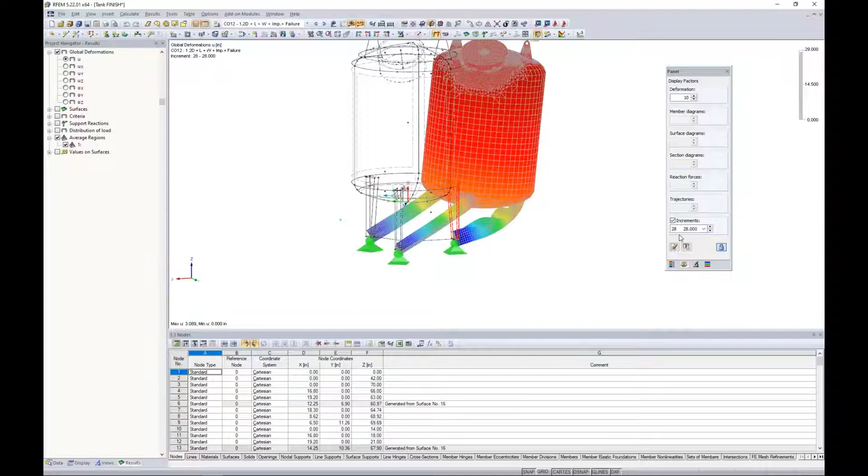Okay, so that is essentially going to conclude our webinar today, and I will jump back to the PowerPoint for just a little bit of closing information.